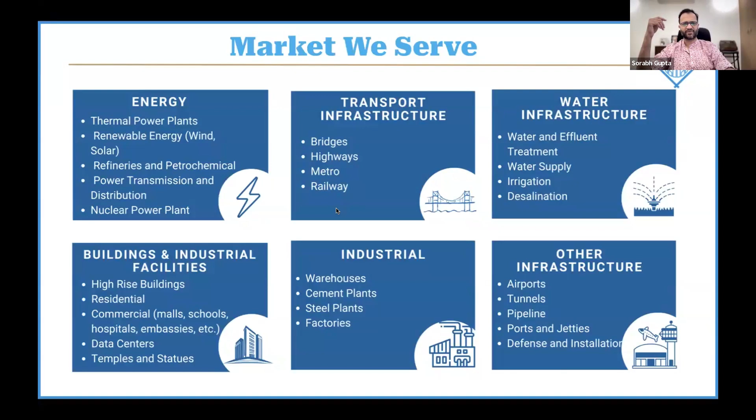We believe very strongly that professional associations such as DFII are very important in the life of an engineer. It's important for all of us to actively participate in these forums, share knowledge, learn from and support each other. DFII has been an excellent organization for many years now, so we always encourage engineers to get out of their wells and talk to each other on a common platform, sharing experiences and knowledge. This is something we are very active and vocal about.

Just a quick news item - I think we are one of the first companies in the country to extend the scope of our NABL accreditation to now cover the full range of our field testing. So all the conventional as well as advanced tests we carry out, both geotechnical and geophysical, as well as pile testing, are now covered in our scope of accreditation. I think this is one good step in the right direction. We always encourage all investigation companies to work towards this, so we can improve our service offerings and the quality of our product.

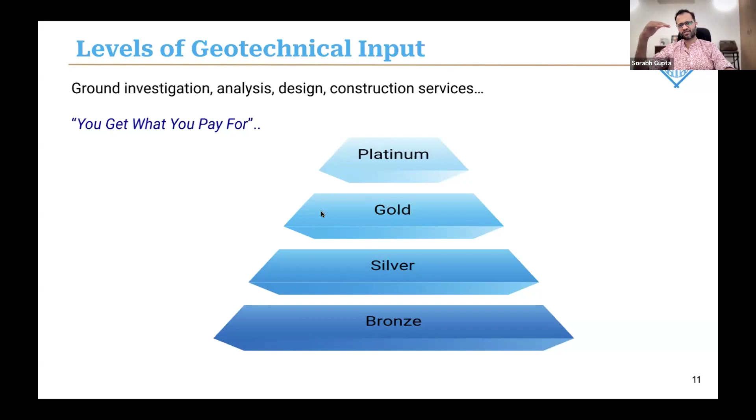We like to say that you get what you pay for in terms of what these levels are. I want to give credit to engineer Chris Haberfield of Golder Associates, who actually introduced us to this concept in one of his talks, so this slide is borrowed from Chris. It's essentially from bronze to platinum level investigations.

Without going into the details of the slide, what we are basically talking about is that as your structures get more complex, as your loads increase, and/or as your ground conditions become more complex or challenging, the requirement is to move up. A bronze level investigation could simply be, for example, a small building in a fairly well-known geology, where we can get by just carrying out a few shallow boreholes and using conservative rule-of-thumb kind of geotechnical design. This is fairly good because for such structures and projects it could be fairly inexpensive, and the risk involved would be high, but we can get away by giving a conservative design to the project owner. On the other hand, these days such projects are few and far between, and most of the time, as land becomes short and our projects get more ambitious, we are moving more and more towards a situation where our demand on the ground is increased.

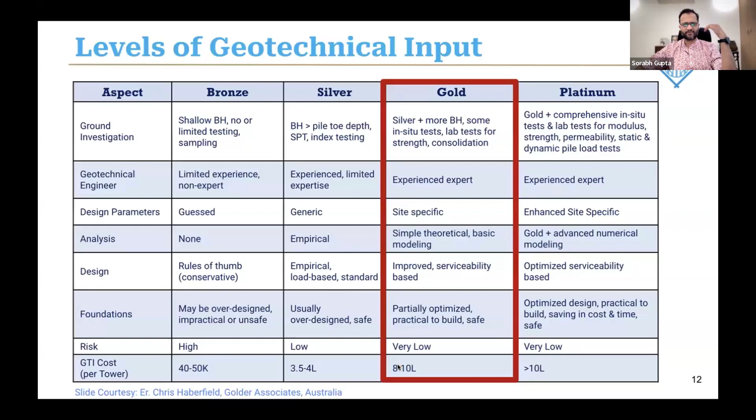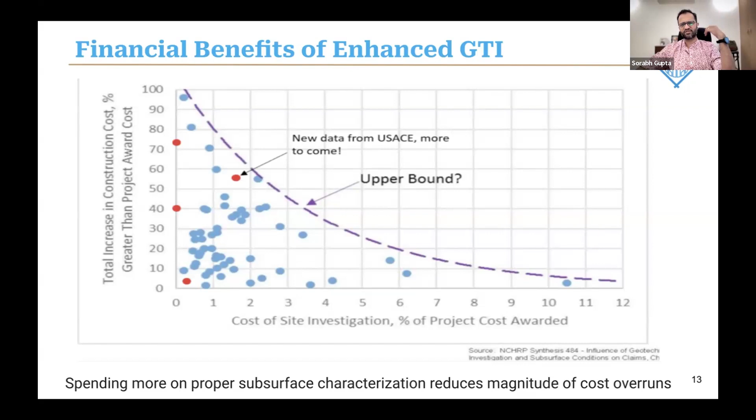Studies have shown, and I think most geotechnical engineers are aware, that as we invest more in proper ground investigations as a percentage of project cost, the cost overruns are well documented. As you invest more in ground characterization, you save on cost overruns, foundation construction timing, and construction schedules. We'll see today how such an investment is almost a no-brainer, because the return from proper investigations is phenomenal for almost every kind of project.

Jumping into high-rise buildings, I'm breaking this presentation into 6 parts. First we'll discuss the codal requirements, then talk about the tools we are using - better SPT, rock drilling, in situ testing, foundation testing - and finally I'll share one or maybe two case studies to illustrate how these techniques are used for better geotechnics.

A quick overview of codal requirements for high-rise buildings. For those who may not be working on high-rise buildings day in, day out, there's been a lot of movement in the codal requirements in the right direction. We now have a new code, IS 16700-2023, specifically made for high-rise buildings, defined as buildings with height between 50 and 150 meters, roughly 15 to 50 floors. This code becomes applicable for such buildings.

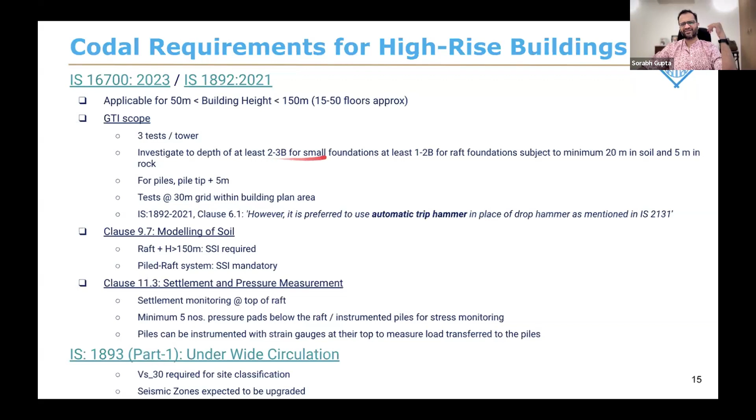This code is fairly good, and largely covers points for structural engineers, but I picked out a few clauses relevant to geotechnical engineering, starting with scope of investigations. The code refers back to IS 1892-2021. It clearly says that for high-rise towers, you require 3 boreholes or 3 tests per tower. The depth of investigation should extend to at least 2 to 3 times the width of the foundation for small isolated or open foundations.

For raft foundations, depth should be at least 1 to 2 times the width of the foundation. In non-tower areas, typically a grid of 30 to 40 meters is recommended for ground investigation. I'm also pointing out IS 1892 clause 6.1, which, as Dr. Partha Sarthi shared last time as well, shows the code is moving towards preference for automatic trip hammer use in SPT. The code also suggests that for rafts and tall buildings, soil structure interaction studies should be carried out to better understand distribution of K values at the foundation level, and for better soil structure design.

What is also very nice is clause 11.3 of IS 16700, which now mandates carrying out settlement and pressure monitoring for foundations, and I think this is great. Instrumentation is the future and should have been the past as well. It talks about the need for settlement monitoring for rafts, installing pressure pads below the raft, and also instrumenting piles with strain gauges, so you can actually measure the load transfer to the piles.

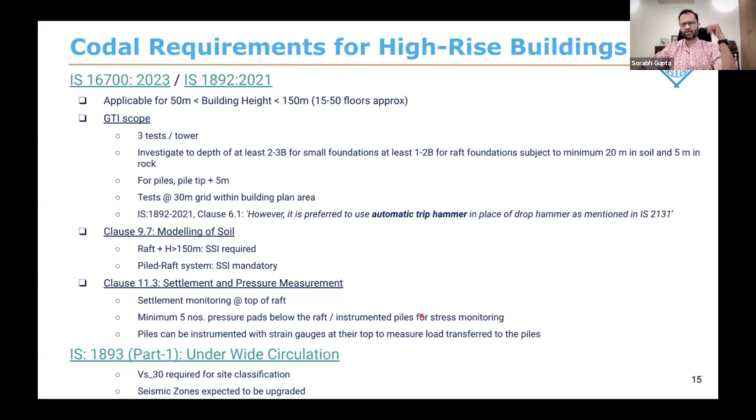I just want to mention IS 1893 Part 1 is currently in wide circulation and should be out soon. Apart from changes in seismic zonation, there are also expected changes in how we decide the site class. Once this code comes into action, rather than using SPT values for site class determination, we will need to carry out shear wave velocity tests at every site to get the VS30 values and define the site class based on that.

A little bit of technical discussion - I want to talk about SPT, the standard penetration test. This is an oft-discussed topic, but I want to keep driving on this point. Most geotechnical engineers worth their salt will agree with me when I say there's nothing standard about the SPT. This is something we're trying to educate customers about over and over again.

Obviously, your SPT number depends on so many parameters - your drilling and borehole technique, the type of equipment used, the test procedures used, the energy delivered, the overburden stress, and the ground conditions. So chances are, if you carry out SPT alone, using different equipment, different teams, or different kinds of hammer arrangements, you are going to get different end values.

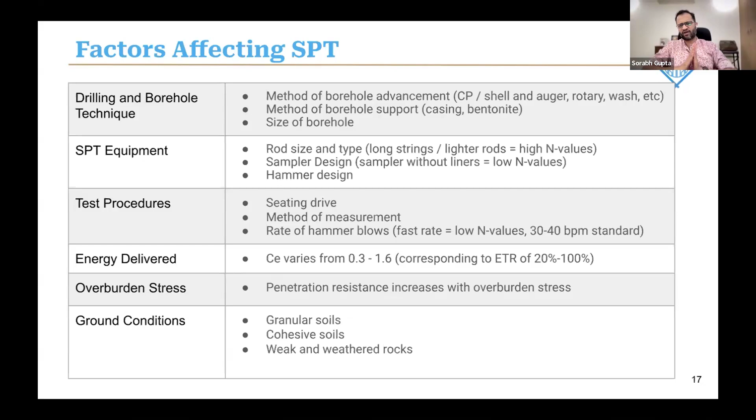I strongly believe that relying solely on SPT N value for geotechnical design may not be the smartest thing to do, because sometimes you could err on the side of caution, sometimes you're erring on the side of risk. It's very important as engineers, especially geotechnical engineers dealing with such complex material, to have data collected from various sources and corroborate the results before deciding on the design profile and foundation performance.

So one solution is to extend NABL accreditation to field testing. That step we have taken. Now the hammers themselves, which are supposed to be 63.5 kg, are calibrated. At least the weight has to be accurate.

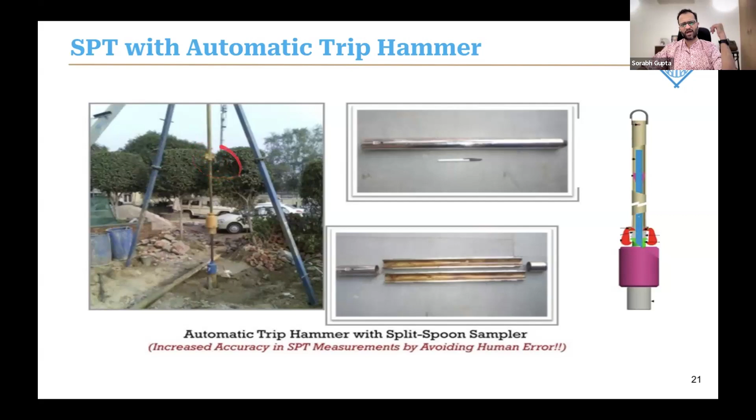The second improvement, and I think these are very inexpensive improvements which should be mandatory for all investigations, is the use of automatic trip hammers for SPT so that the height of fall is consistent.

The third thing, which is becoming quite popular, is we recommend carrying out SPT energy measurement for every project, for every rig or SPT arrangement being utilized. I'm happy to report that in the last year and a half to 2 years we have made a lot of effort, and today 70 to 80% of our projects carry out SPT energy measurement in-house for the customer, correcting the N values to N60.

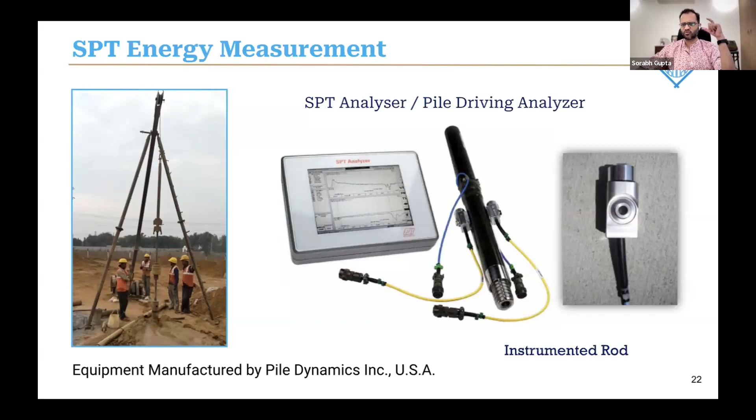This is important because the backdrop is that the N value we're supposed to use in analysis is N60 - that's what all the correlations tell us. 60 standing for 60% of the potential energy that should be transferred to the soil.

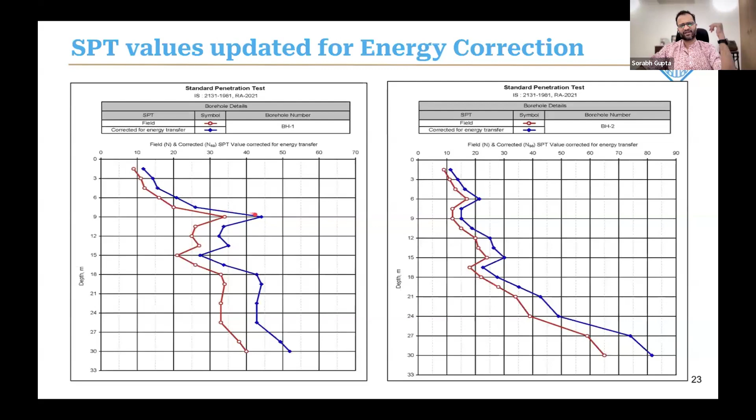The problem is we never bothered to measure it, so we never knew what our energy transfer ratio was. Now that we are measuring it, we are able to correct these raw field N values to get corrected N60 values on site.

This is very powerful because if you're able to correct your SPT values to N60, not only do you homogenize data collected by different types of SPT equipment, you also reduce the scatter in your SPT N values - sometimes the scatter was simply because of the nature of the test itself. We also managed to somewhat increase the reliability of SPT measurements.

If you're using SPT as your sole tool for deciding the net allowable bearing pressure, there's a direct correlation. So an SPT N value of 10 might give you, say, 100 kPa net allowable bearing pressure. You change that by just 30%, and your net allowable bearing pressure changes by 50%. So for small foundations, or any kind of foundations actually, energy corrections should be mandatory.

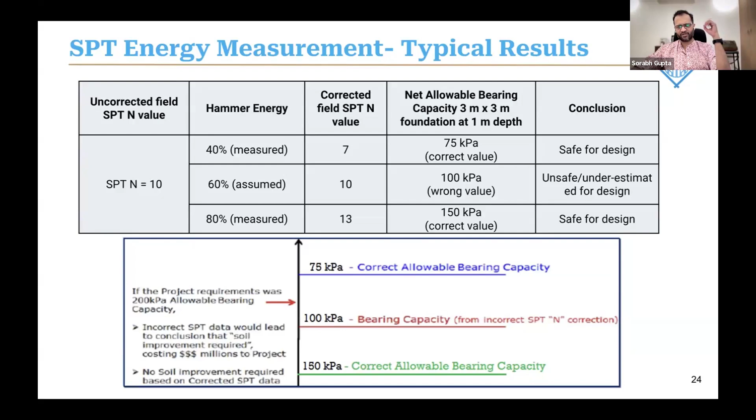That's SPT. Now I'm going to jump into rock drilling. Sometimes we have sites, high-rise buildings specifically in this case, where the buildings are bearing on rock. In Delhi, for example, we have highly fractured and highly variable quartzitic rock, which is hard to characterize at times.

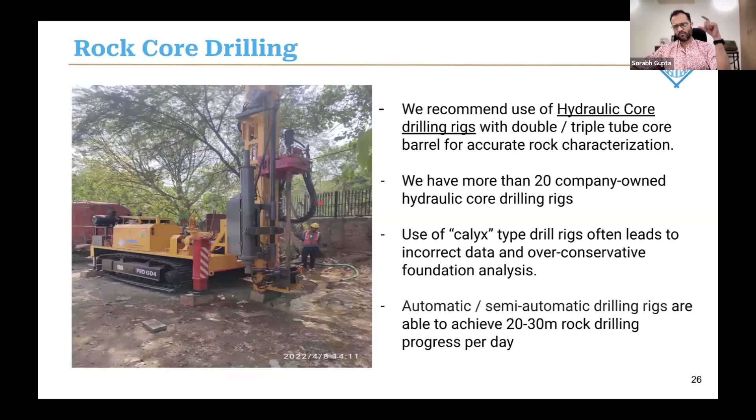For rock drilling, we strongly recommend always the use of hydraulic core drilling rigs only, with double or preferably triple tube core barrel for proper characterization of the rock. We do not recommend locally made Calyx kind of drill rigs, which we feel and have observed give incorrect rock core data and over-conservative foundation analysis. These automatic or semi-automatic drilling rigs are better, not only in terms of progress, but more importantly in terms of quality of the rock cores which we get.

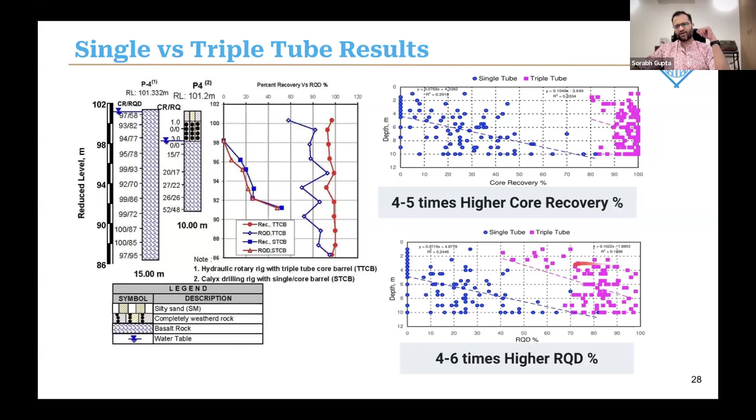Just a quick answer to why we should do this - this is an example where we did a confirmatory test at a site near the Tapi River for a bridge project. If you look at this blue series, this was the core recovery and RQD values we got when someone, not us, used a Calyx drilling rig with a single tube core barrel. Based on this, they had designed huge bridge foundations based on the soil report. When Cengrs went back and reinvestigated the site using hydraulic rigs and triple tube core barrel, the actual core recoveries and RQD values were substantially higher.

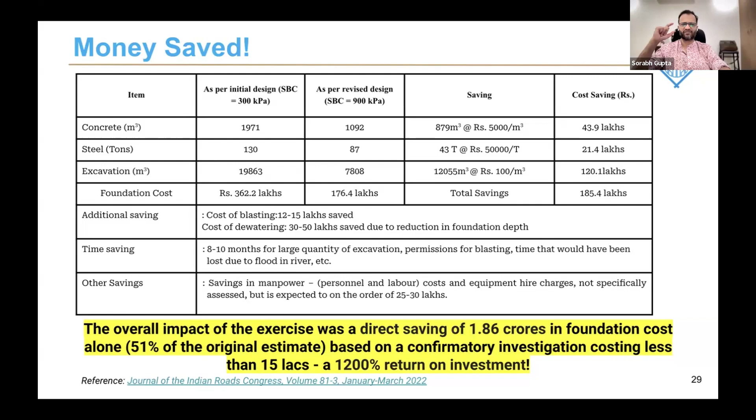Just the only thing is to have that knowledge, to have that awareness, to do the right thing. So that's rock drilling. I quickly want to talk about in situ testing.

This is one of my favorite slides from Professor Mayne, which I borrowed from him. People very often think about geotechnical investigations as boreholes, and we need to dispel this. We are trying to move people away from this archaic thinking that geotechnical investigation is the same as borehole investigation. It's like saying a surgeon will just be given a hammer to carry out surgery. That's not the case. There is a wide array of tools available to us as geotechnical engineers, and each of these tools, just like gardening or surgery, has its own strengths and weaknesses, pros and cons, its own applicability.

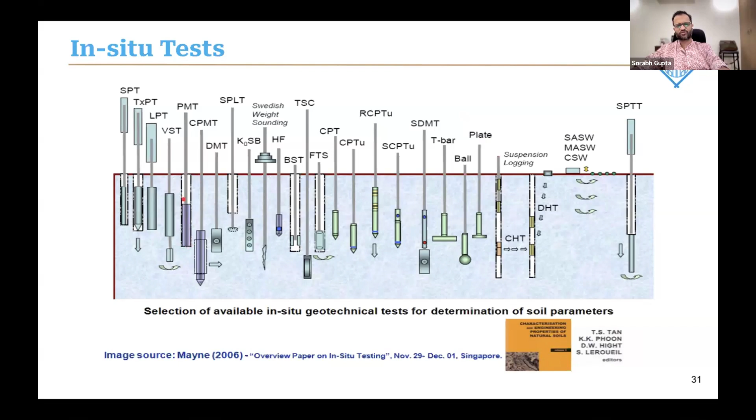This is why it's very important that when you have a project, you spend a lot of time right in the beginning to sit down with the design team and figure out the optimum scope of investigation, using a variety of tools in an intelligent fashion to get the parameters we want for foundation, ground characterization, and foundation design. It's important not to just shut our eyes and do a copy-paste job, a running meters job. It's important to do intelligent geotechnical investigations. It doesn't cost us anything extra to use our intelligence, but there can be tremendous savings for the customer.

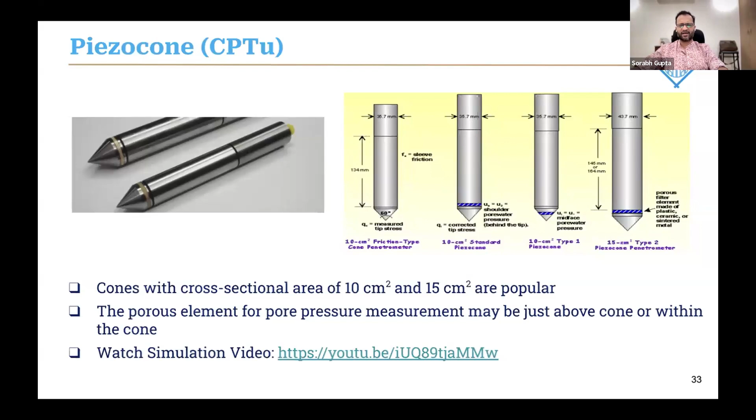One such tool is the electrical cone penetration test with pore pressure measurement, or the CPT. Actually it's the CPTU, the U standing for pore pressure measurement. This is what the piezo cone looks like. It's fairly straightforward. You have pushers which push a fully instrumented cone directly into the ground. The cone has various sensors at the cone tip level, along the sleeve, and so on, to measure cone tip resistance and sleeve friction. It also has sensors to measure depth, inclination, and pore pressure. Sometimes it has geophones inside to measure seismic wave arrival as well. So that's what CPT is, I will not go into further details.

It does have a limitation. CPT, apart from being very expensive since it's not yet manufactured in India and requires some skill to operate, possibly its only limitation is that it cannot be used in rock or boulder type formations. It's largely a great tool to use where you have overburden or soil.

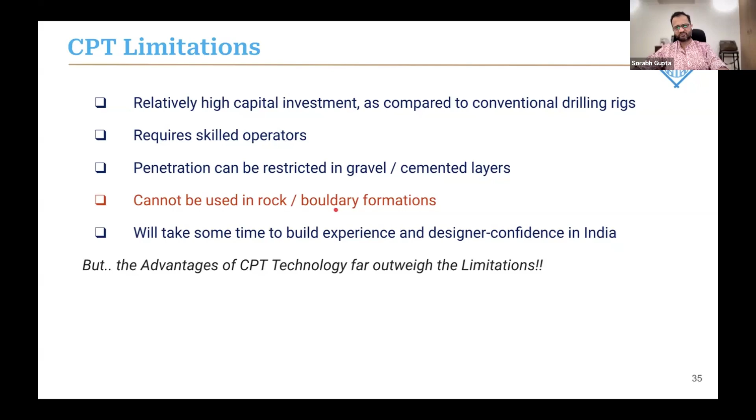That said, the advantages of CPT, I do believe, far outweigh the disadvantages. We like to say cheaper, faster, better, and we'll see how that is. It's not only fast, it's very granular, accurate, and versatile. It can go to deep depths. You can test reliably, and it is safe, clean, and cost effective.

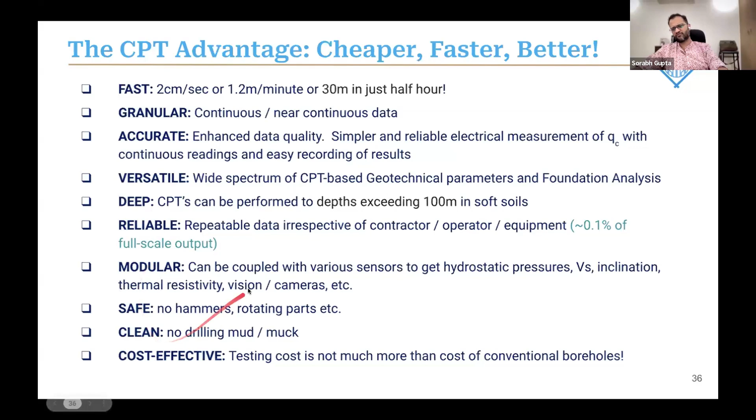Let's look at how fast this is with a quick example. If you do a borehole of say 30 meters, typical turnaround time including rig shifting, drilling, sample transport, lab testing, report compilation and so on, is a minimum of 15 to 30 days from start to report. In a CPT, if you do a sounding to 30 meters, you can complete it in just about 2 to 3 hours, and have a report in hand in 4 to 5 hours. In today's fast-paced environment, saving time for investigations is very powerful, because it gives more time for design and more time for construction.

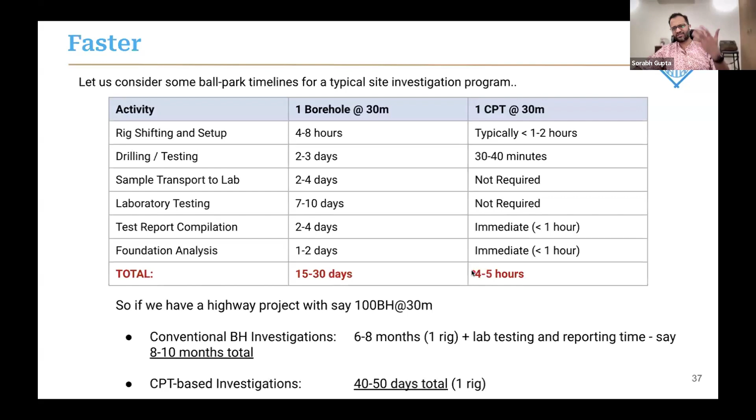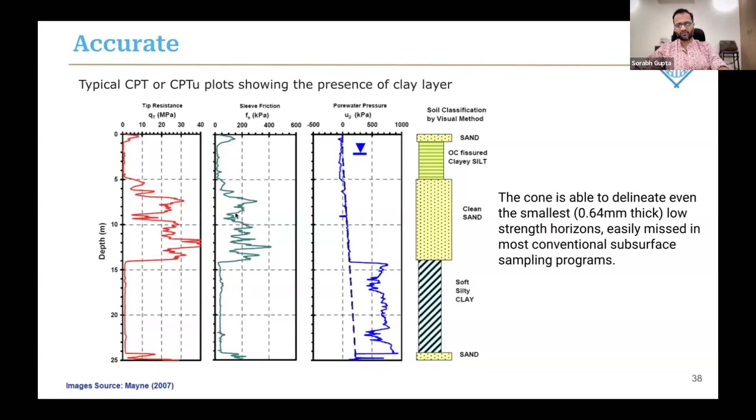Of course, CPT is far more accurate compared to conventional borehole investigations. In borehole investigations, we get data points every 1.5 or 3 meter intervals where we do SPT and collect samples. In a CPT, because it's digital, you get continuous profiling of the ground, with data points every 2 centimeters. That's good because even a thin seam at any depth can be accurately captured during investigation, which would typically be missed in a borehole program. It's also highly repeatable, and I love this about CPT. If you do a CPT at the same location multiple times, you will almost always get exactly the same data.

Something which we could not even imagine when we are doing boreholes - you do 2 boreholes at the same location, you'll usually get around a 20-25% variance in the SPT N values. In CPT, the fact that it's repeatable to the extent of 0.1% of the full-scale output, I think this is very powerful because it gives a lot of confidence to the geotechnical designer.

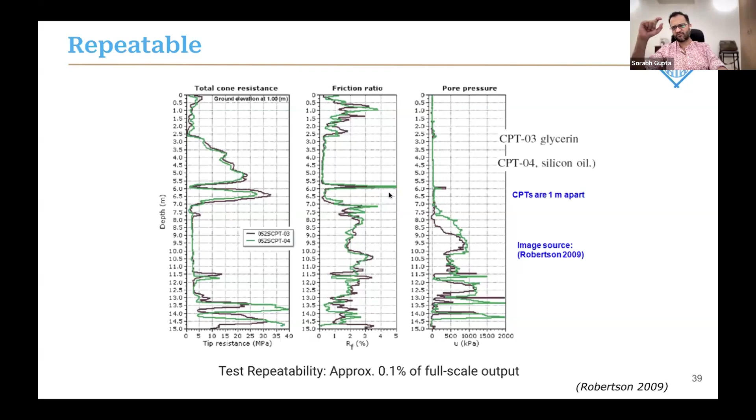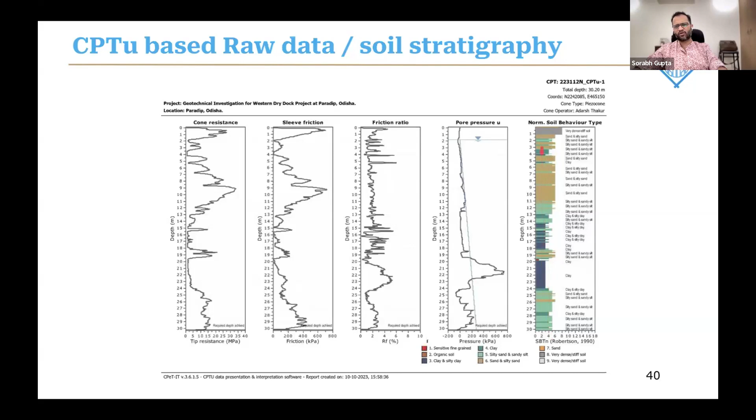Because you know that you are getting data which is consistent, repeatable, and highly representative of the actual ground conditions. This is typical CPT data, and since it's software driven from Robertson's charts, you also get your soil type or soil behavior type from CPT. We've done thousands of CPTs and compared with physical classification from boreholes, and we have found that the soil behavior type from CPT is usually fairly bang on compared to what you get from borehole investigations.

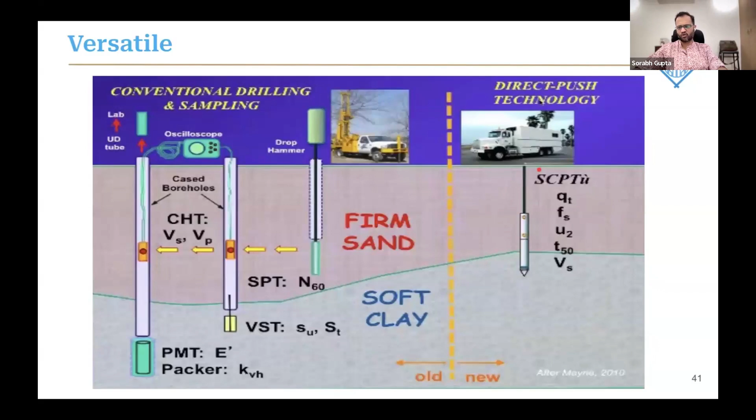There's also the versatility of the test itself. While if you want parameters you have to do a host of other tests, if you don't have time or budget, you can push a cone into the ground and get a fairly good handle of all these various soil parameters in a single push. So very versatile and powerful for pre-bid preliminary investigations, also very useful for detailed and confirmatory level investigation.

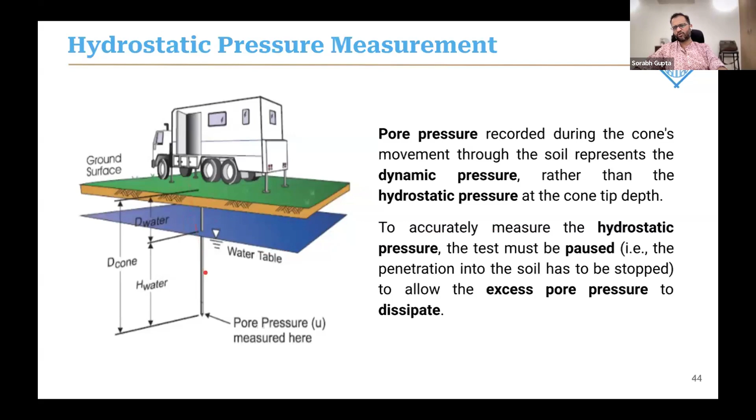Since we're measuring pore pressures, you can actually get a fairly good idea of the hydrostatic pressure when you push a cone into the ground. You can also stop the cone and carry out dissipation tests, which is very powerful if you want to understand the compressibility of the ground, or the hydraulic parameters, the permeability of the soil surrounding the cone.

I would like to point out, since this is an in situ test, the quality of consolidation and permeability data you get from a CPT is far better compared to what we get when we withdraw a so-called undisturbed sample from a borehole, take it back to a lab, put it in an oedometer or consolidometer, and test it. I really feel in situ testing gives much better characterization in terms of compressibility and permeability.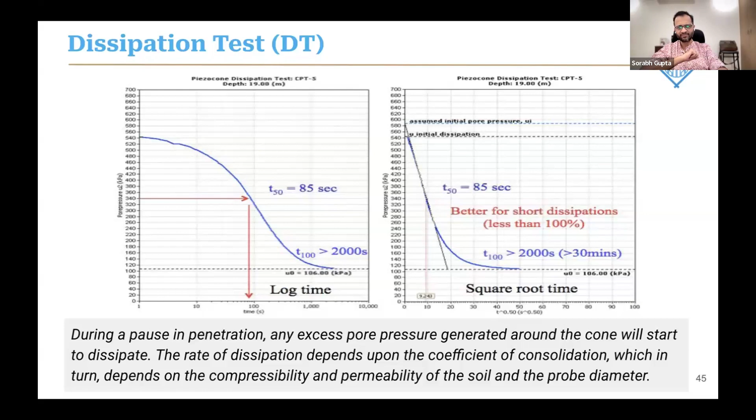A common complaint used to be that you can't take samples in CPT. For some reason, many people still wanted to physically see samples before making a decision. So we added capability to collect soil samples using the CPT equipment itself - a push sampler, a dummy cone with a piston-like sampler, which can be pushed into the ground, allowing us to collect physical samples of soil at discrete depths.

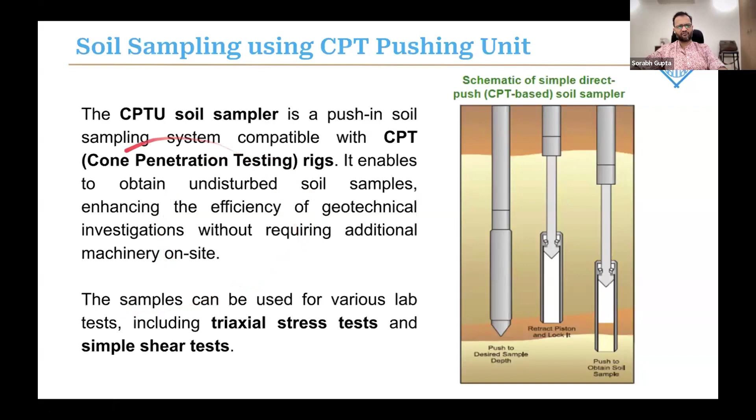This is fairly useful if you don't have a drilling rig at site, just a CPT rig. Very useful because then you're able to collect a few samples, carry out some confirmatory tests in the lab, check your classification, and so on. So it's very good for situations where you don't have a drill rig at site.

That's about CPT - I'm not going too much into depth, just trying to give an overview of these test methods. Pressure meter test is another favorite. If you go to France, most investigations are done using the pressure meter, and that's where we got our equipment from. This is a Menard pressure meter, which you see here in the photograph.

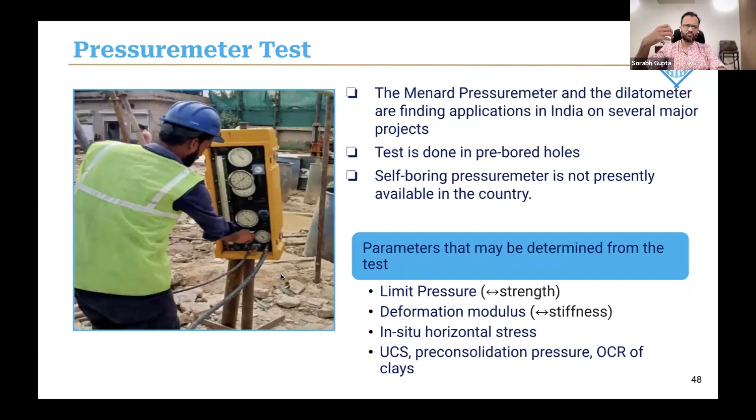Now I want to talk about why this is important - why this is so exciting. If you look at high-rise buildings, you have the strength criteria and the stiffness criteria, or the shear and settlement criteria for design. Most large-sized rafts are unlikely to fail in shear, so we never really go up to the full ultimate strength of the soil. What we are working with is the serviceability criteria - we look at the settlement criteria, and the key performance parameter of the ground we're trying to decipher from our investigation program is the stiffness profile of the ground.

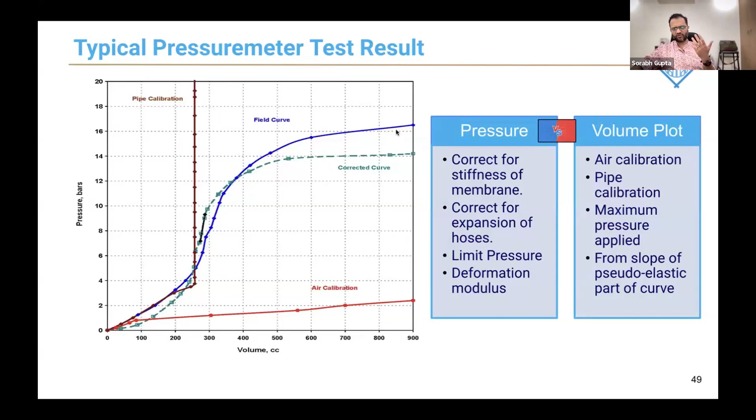You'll note here that the stiffness characterization from in situ testing is roughly 3 to 4 times higher compared to what we believed the stiffness of the ground was when using empirical correlations based on SPT.

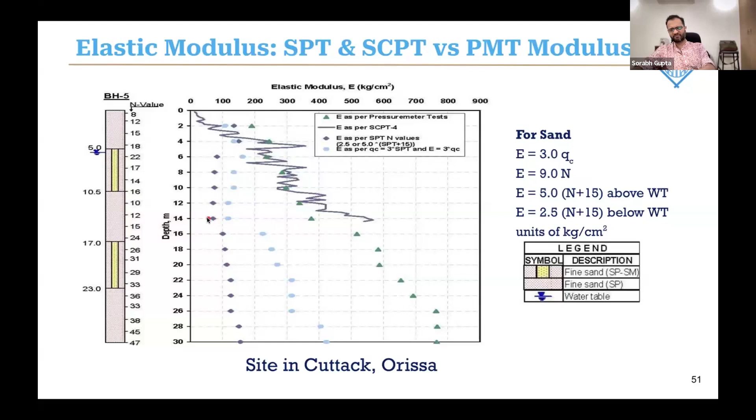Before that, I want to talk about shear wave velocity. It's fairly common today in most infrastructure projects, not so much in building projects. In high-rise projects these days, shear wave velocity tests are being carried out, and I think once the new 1893 code comes out, this will become an everyday test for us, so it's good for us to understand.

There are many tests available for determination of shear wave velocity profile. I want to talk about two of these. The first is a cross-hole seismic test. I think this is the gold standard test in the world for accurate determination of shear wave velocity profile. The test is fairly straightforward.

We make 3 boreholes typically, 1 source and 2 receivers. Once the borehole is drilled, it's cased, and the annular space between the casing and the ground is grouted bottom up. Once the grout sets, you go back to the site with this kind of equipment. You lower typically a source, usually an electromagnetic kind of source triggered from the ground, into the first borehole, and you lower triaxial geophones into the other 2 boreholes.

The concept is very straightforward. When you generate the seismic waves at the source and catch them at the geophone locations, the velocity calculation is simple: velocity is distance by time. Assuming you know the distance between the source and receiver, you divide that distance by the time it takes for the compression and shear waves to travel, and with that you get the compression and shear wave velocities.

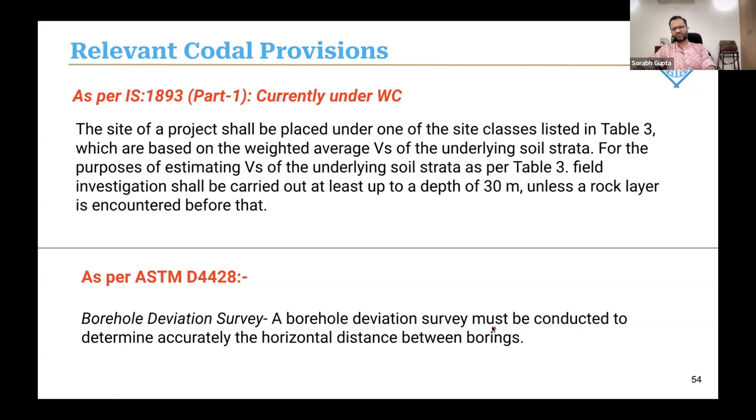I also want to point out that when we talk about crosshole testing, something we sometimes miss is the borehole deviation survey. I'm pointing to ASTM D4428, the standard we follow for crosshole testing, which almost mandates carrying out a borehole deviation survey. So what is a borehole deviation survey and why is it important?

I'll get into that, but before that, this is what the crosshole seismic test results look like. You get your shear and compression wave velocity profiles, and based on that, you can compute your dynamic Young's modulus and dynamic shear modulus profiles, as well as your dynamic soil parameters.

I want to point out the reason we are carrying out crosshole seismic tests right now is for this: when we get the dynamic Young's modulus profile, this is very powerful because it's essentially Gmax, the low strain dynamic modulus, the elastic modulus of the soil. If you look at any degradation curve, this is typically at very low strain levels, but if you degrade this modulus down to the strain level of interest, typically 2 to 3%, you get a fairly good handle of what would be the equivalent static Young's modulus at the strain levels of interest.

So we typically degrade this modulus down to our design strain levels, and we always compare the modulus value with what we got from CPT, from pressure meter, and also from lab testing and empirical correlations. So all of this effort goes in one direction: again and again, we are trying to understand the stiffness profile of the ground so we can do serviceability or performance-based design better.

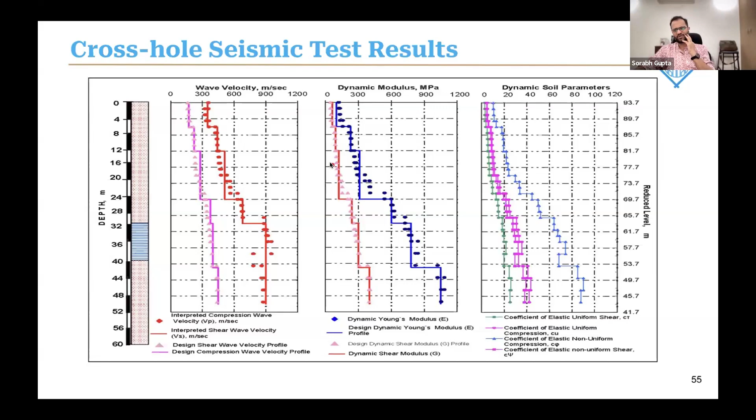I talked about borehole deviation survey, and why that's important is it's very straightforward. You put an inclinometer between the source and the receivers, and the objective is to measure the distance between the source and receiver at various depths to get that distance profile. That's obvious because when we did the crosshole test, we were measuring the time of arrival in microseconds. But if you don't know the distance between the two boreholes with depth, all our computations are essentially wrong. You can't just put a tape measure at ground level, measure 3 meters, and use that as the distance traveled by the wave at depth. It's simply wrong, and all the time and money invested in crosshole would be wasted. So if you're carrying out crosshole, always remember that borehole deviation survey is a must to get proper crosshole seismic test results.

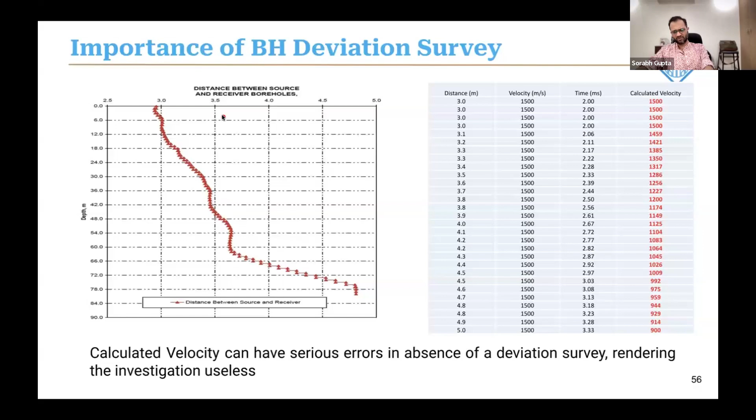The second test - I'm a huge fan of crosshole seismic. We've been doing it for 15, 20 years now, in-house with our own equipment. The only problem with crosshole is it's expensive, because you have to make 3 boreholes, grout them, and carry out this test at site. The second problem is it takes a lot of time. Between drilling, grouting, grout setting, and testing, typically 25 to 30 days is the turnaround time for getting my shear wave velocity profile. That's fine, it's a good investment if you have a critical project like a refinery or power plant - definitely, by all means, we should do it.

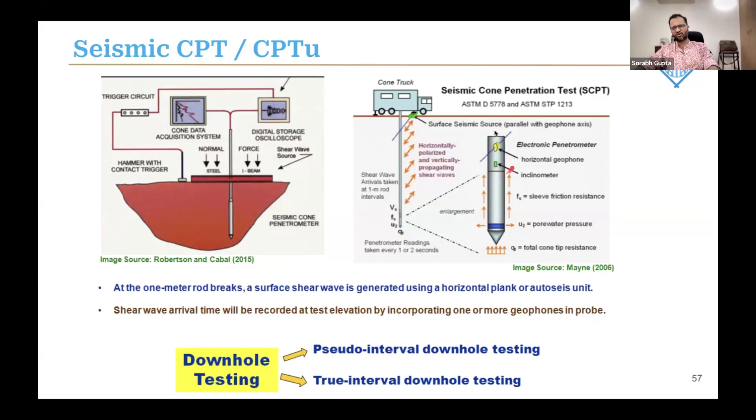But in some cases, where we need a quick estimate of shear wave velocity, the other solution we offer is the seismic CPT. Remember we talked about the cone penetration test - we also have a different module now known as a seismic cone. A seismic cone is essentially a piezo cone, measuring cone tip resistance, friction ratio, pore pressure, inclination, depth - all the usual stuff. In addition, there is a seismic module, a follower attached to this cone, which also has geophones built into it.

That's powerful because now we can actually do a CPT and stop the seismic cone at a certain depth. We can use a ground source for seismic wave generation, and carry out a sort of downhole seismic test using the seismic cone. So you know the distance traveled by the wave and the time it takes, and you can get a fairly quick determination of shear wave velocity profile using a seismic cone.

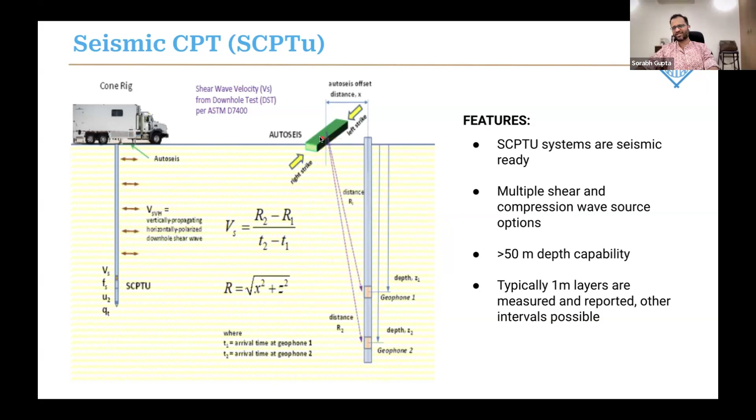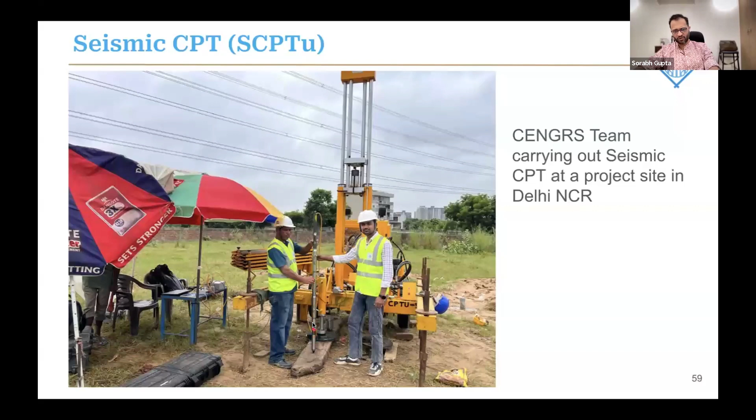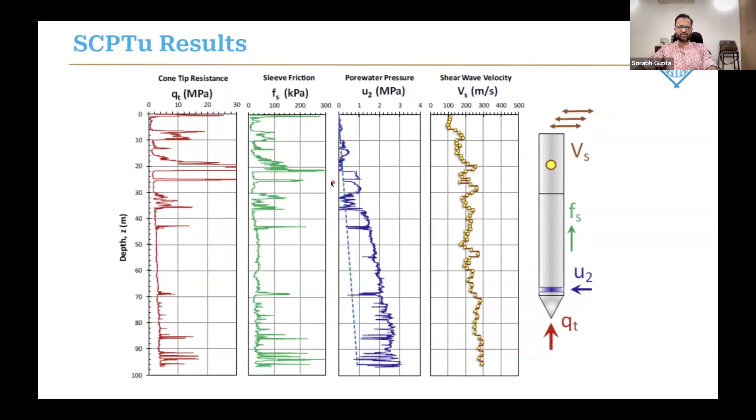Personally, the reason I'm very fond of this is not only because it's cheaper and faster for the customers, but what I really enjoy is the quality of seismograms you get in a seismic CPT. We bought this a couple of months ago, so we are still playing with it. This is the seismic cone with the seismic module follower on it. The quality of seismograms and data you get is tremendous because there's no disturbance to the ground - no requirement of boreholes, casing, or grouting. Since it's a direct push method, you get very good quality waveforms, which makes it possible for us to have very confident, accurate picks for compression and shear waves. The only limitation of the seismic cone is you can't do this where you have very hard strata or rock - in those cases, you have to go back to borehole investigation techniques.

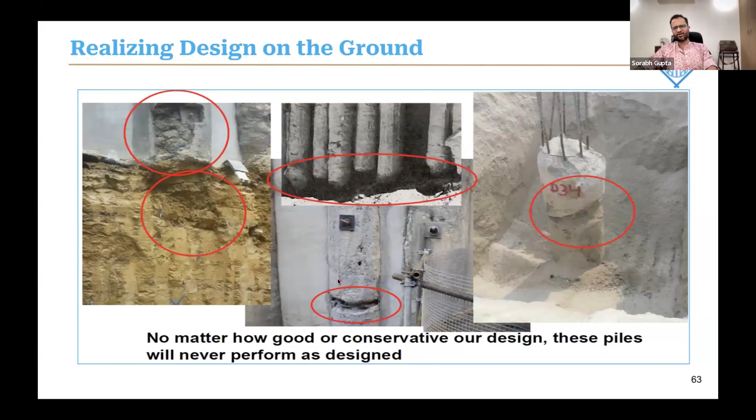I'm going to skip this slide. So we talked about different techniques. I want to wrap it up by talking about foundation testing. No matter how much investigation and good design you do, there's absolutely no point if we cannot translate a design onto the ground. So it's very important for the geotechnical and structural engineer to work together during the design and construction phases.

Often the geotech engineer is forgotten after the soil report is issued, and this is not a good trend. We encourage customers to involve us all the way through until the foundations are done and dusted.

It's very important to carry out third-party foundation testing at your site. It's not a good idea to put it in the scope of the piling contractor. It's always better that the owner gets the QA/QC done by a third party for his project.

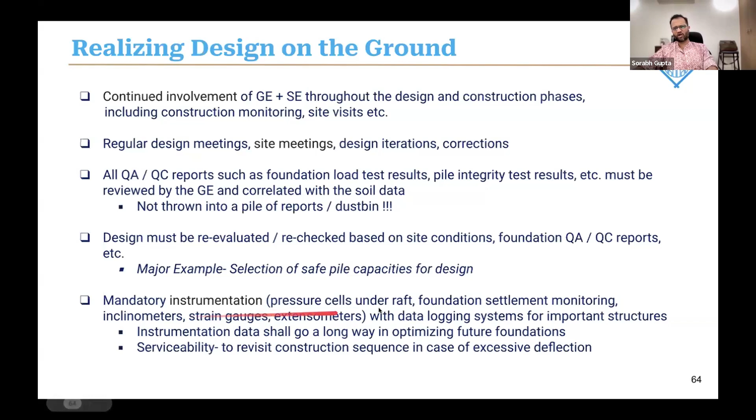And obviously, instrumentation is always a great idea for projects. These days we have so many options for instrumentation, let's take advantage of that.

It's 5:45, so I'll quickly show you a case study. Pranav, how much time do I have approximately? Maybe the last 5 minutes. Oh yeah, so I'll breeze through this.

This is a group housing project in Sector 104, Gurgaon, which we concluded a couple of months back. These are 5 high-end towers, 40-storied, and some 2 towers of 30 stories with 3 basements. There's also some commercial building and so on.

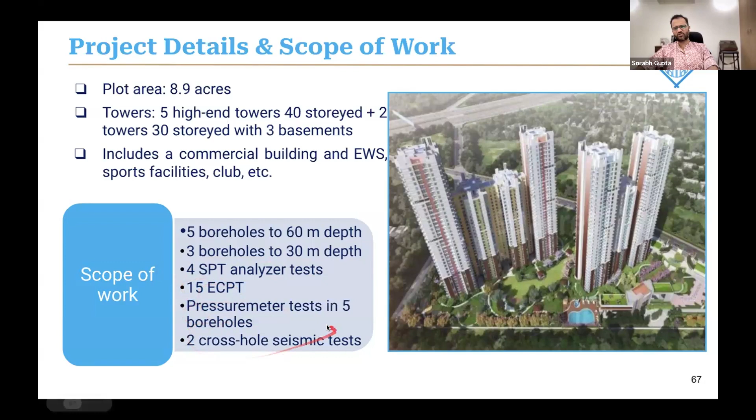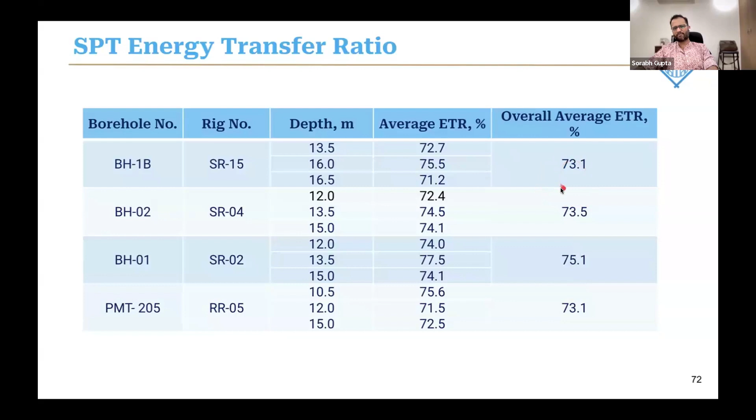Quickly look at what you get, the ETR value, when we use a standard automatic trip hammer mechanism, the ETR value is around 73%. It's fairly consistent, which is nice, for 4 different rigs we got fairly consistent ETR values. Essentially this means you're able to bump up your SPT N values by a factor of 73 divided by 60. So we managed to correct the N values to N60. This is the first level of improvement.

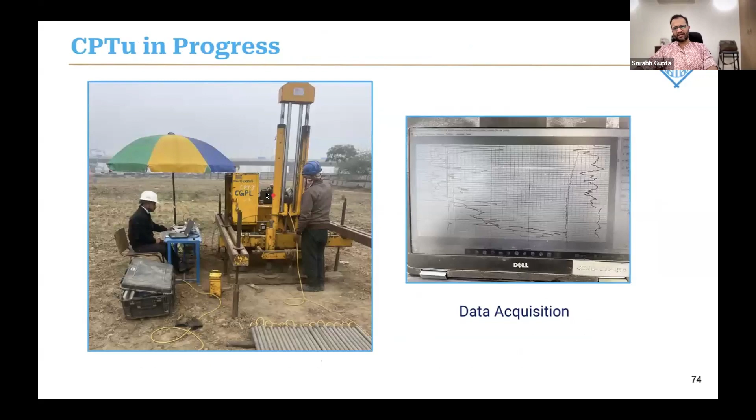We did CPTs and got some CPT data. We always have a lot of fun with CPT because when we're doing a bunch of tests, we get to cross-correlate what we get from boreholes and what we get from CPT. This is standard practice now, we have a huge database of over 1,000 CPTs which we've correlated with borehole data, and we're always amazed at how well it correlates.

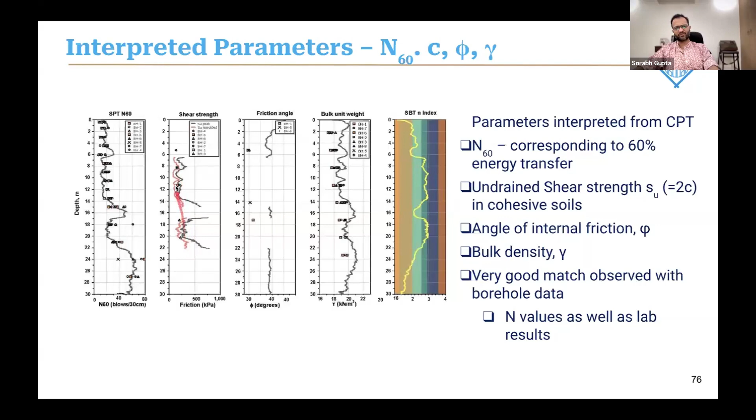Look at the SPT N60 value based on CPT and how well it matches what we get from the adjoining boreholes. Shear strength, same condition, the predicted shear strength values from CPT match what we get from the lab. Also friction angle, unit weight, and so on.

I don't have time to go into this, would have loved to, but this is the CPT results. Also, I want to point out we also get shear wave velocity from CPT, and we cross-correlated that with what we got from cross-hole seismic tests at the site, and you see how good the correlations are.

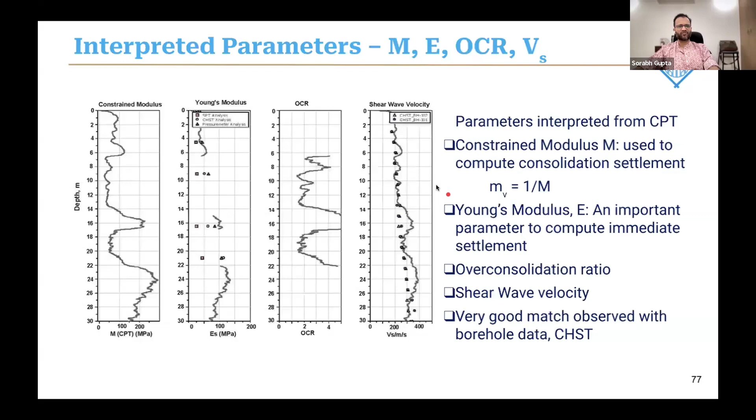This could be the topic of a long discussion, but for now I want you to take away that as long as these different approaches tell the same story and things match, geotechnical engineers can go to sleep and sleep easy.

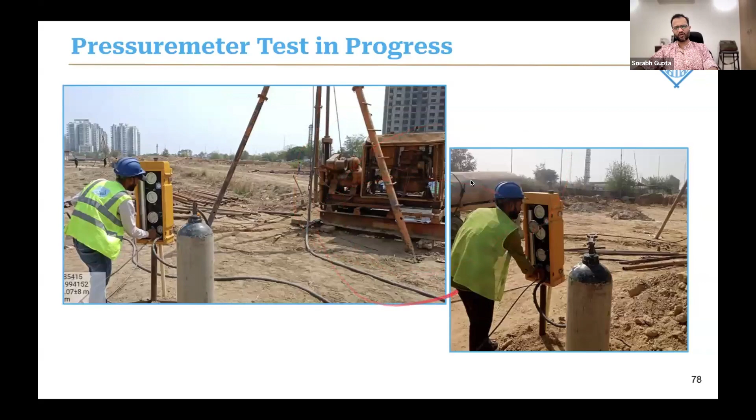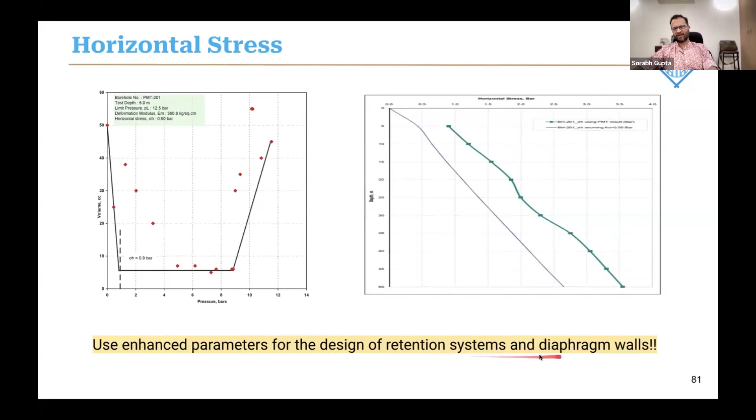I want to point out we also use pressure meter data to calculate the horizontal stresses at the site. These days, with multiple basements in most high-rise buildings, this is very powerful because it's the only way you can actually measure or compute the horizontal ground stresses, which will act on the retention system and on the diaphragm walls. So it's very good input for design of underground retention systems as well.

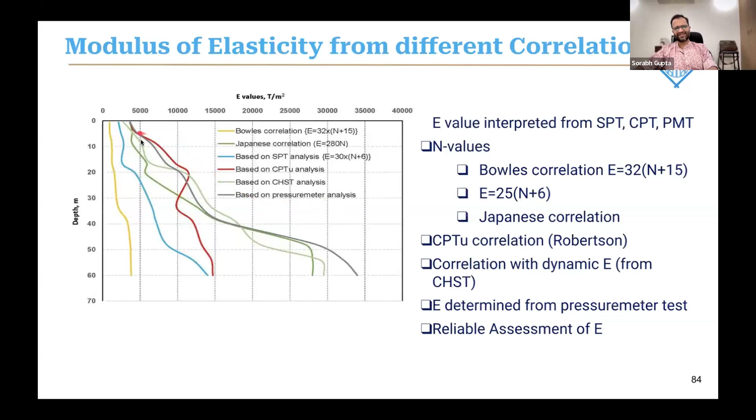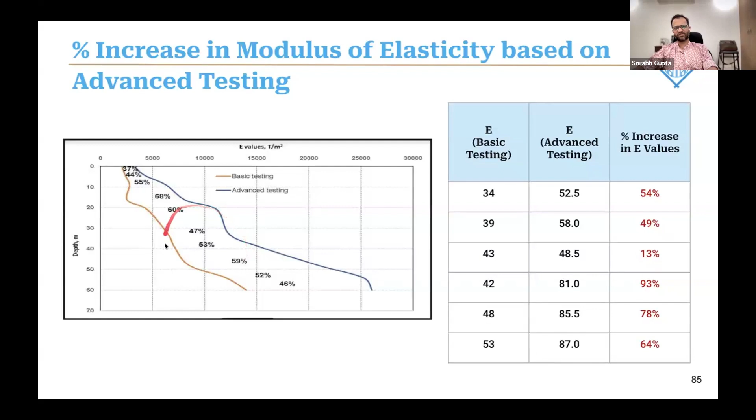So we select the design profile based on advanced testing. We're able to select a better stiffness profile, which, as you see here, is typically around 50% higher than what we could select based on conventional testing. And that makes my foundation analysis all the better.

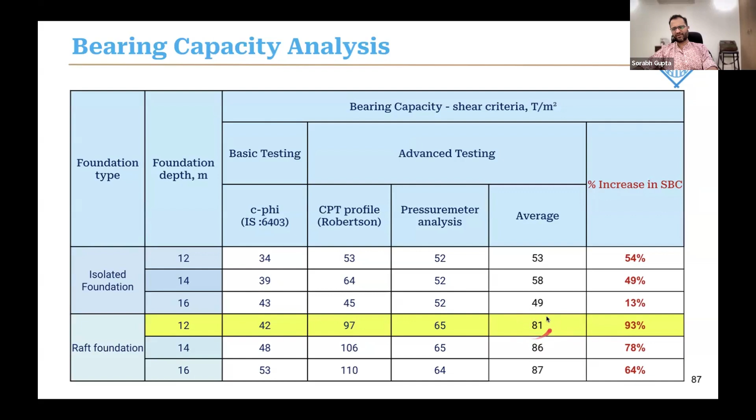So we did a quick comparison for a raft bearing at 12 meters, where basic testing means borehole based or SPT based predictions. We got bearing capacity shear criterion of just 42 tons. We managed to recommend as much as 81 tons, so almost double the SBC, remembering SBC is safe bearing capacity based on shear criterion. So we could justify almost double the SBC values.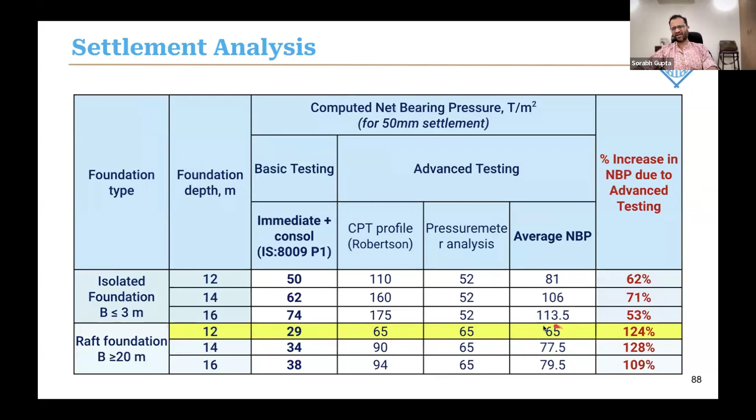In terms of net bearing pressures, settlement criteria, at the same depth, in place of 29 tons per square meter which we got from boreholes, we could justify the use of 65 tons per square meter for the same foundation at the same location. You see how powerful that is, because you are able to bump up your net allowable bearing pressures by almost 110 to 130%.

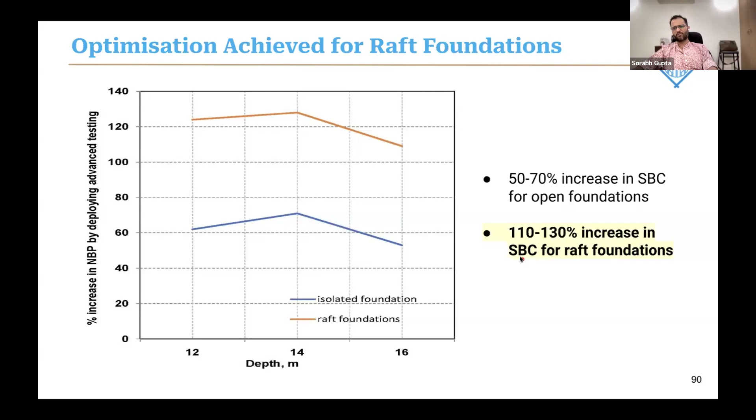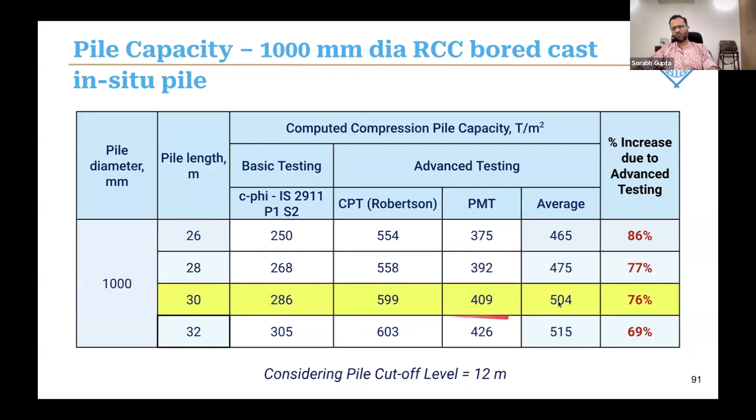At the same time, it's the same story for piles as well, where our earlier calculations based on IS 2911, based on the c-phi method, we could compute 286 tons. Now we were able to compute 504 tons, so a 76% increase in safe pile capacities as well. So that's for us, right?

What this means for the customer, I took some help from my friend who's a structural engineer, and for this project he calculated what this means in terms of cost saving, because end of the day, the buck stops with the cost of the project. So with basic geotechnical or borehole testing, we got an SBC of 34 tons per square meter. The cost of the foundations was around, I don't have the total cost, it will come in the next slide.

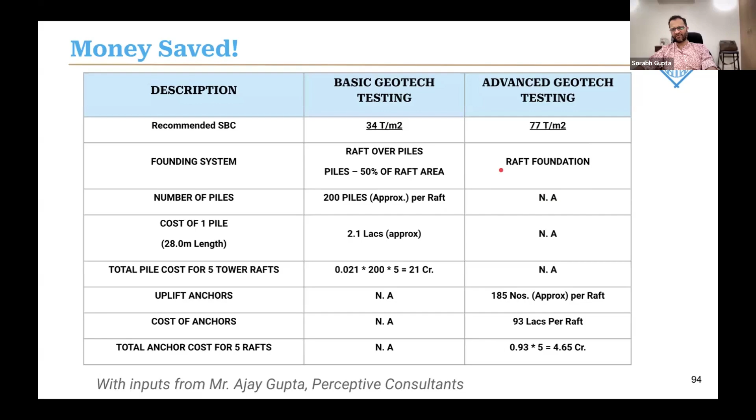So he had originally planned pile foundations based on the original testing. This is a true story, because he actually got a soil report done where the customer was willing to go with 200 piles per tower, and the budgeting was all done. When we came back and did advanced testing, we managed to eliminate piles altogether, and gave a design based on simple raft foundations.

The cost saving of this exercise - while the spend on advanced investigation was around 45 lakhs, still a large number, and the customer balked when we gave him this cost - when we finished the work after 2 months and came back to the customer, we managed to show him that he saved more than 16 crores in material cost of foundations alone. And that's a 3,600% return on investment.

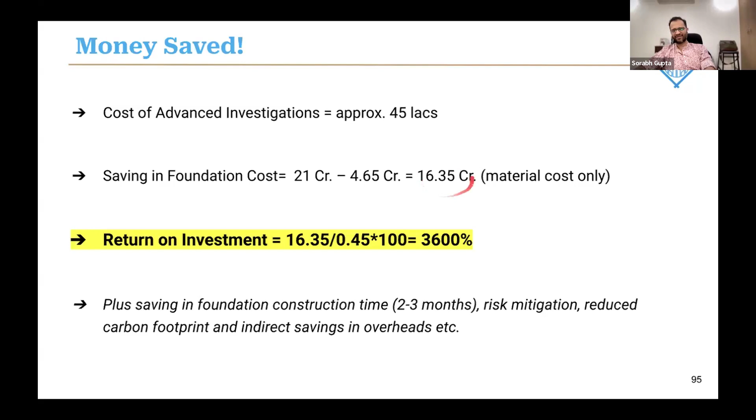So we started doing these things because we realized that this is the language customers understand. And where 16 crores is material cost, if you start adding the savings in foundation construction time of 2 to 3 months, reduced carbon footprint, savings in overhead, etc., the cost saving effectively for the customer is upward of 40 to 50 crores, right? So that's huge cost saving for the client.

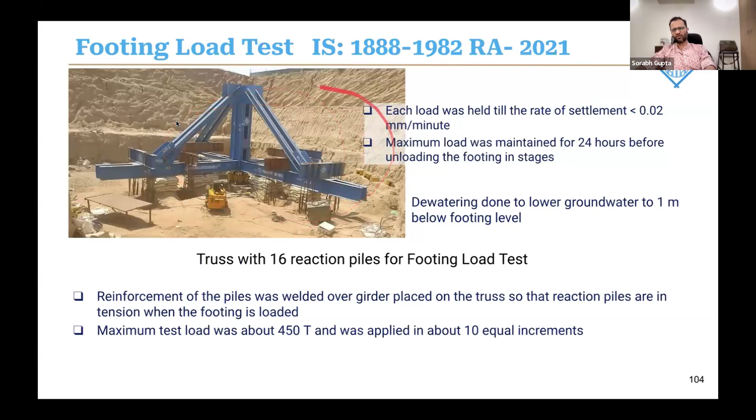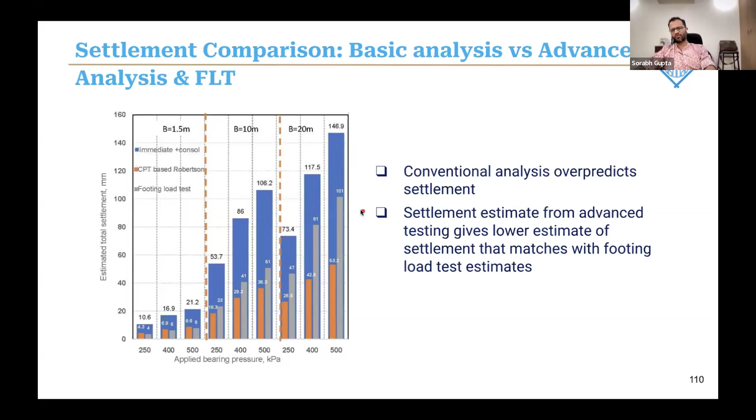I don't have time for a case study too, I just want to point out one thing. We've done a lot of these projects now. What we did not do in the last project, and we did here, is we also carried out a footing load test on a 2x2 size footing. So we are checking what the settlement predictions based on model tests at site give, against what we get from our theoretical estimates, and we found that even the model tests at site match what we get from advanced testing quite well.

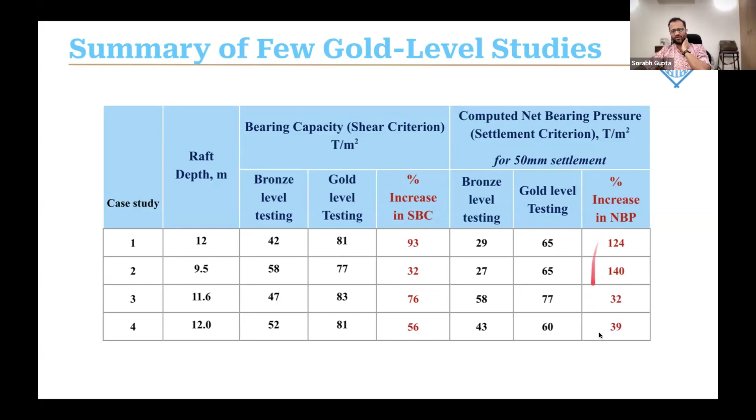I want to close with the last 2 slides. We've carried out around 25 to 30 high-rise building projects in the last year and a half alone. I'm still putting the results together, but I want to share 4 different case studies just so you don't think the results I showed are anomalous. Consistently, when we do better investigations, we are getting better safe bearing capacities and better net bearing pressures in almost all cases. So better testing, better design - that's my conclusion right there.

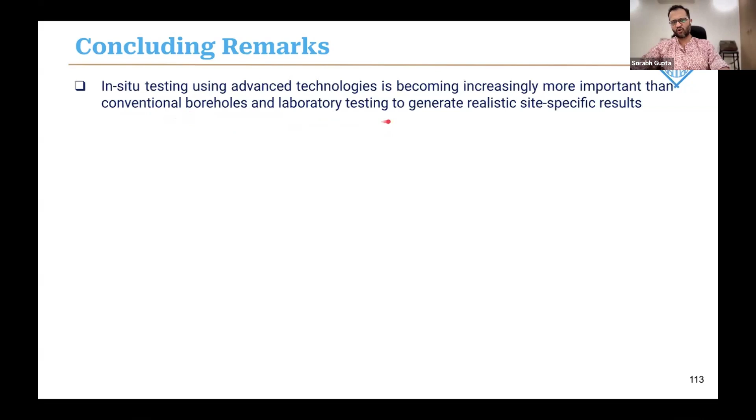I'm going to close with this slide. In situ testing using advanced technologies is becoming not only increasingly more important, but we are also becoming more aware of these techniques, and they're becoming more popular compared to just conventional borehole and lab testing results. We encourage everyone to invest in gold level geotechnics for critical projects, not only high-rise buildings but also refineries, power plants, highways, you name it. It's important for improving not only the safety of foundations of structures, but also foundation performance.

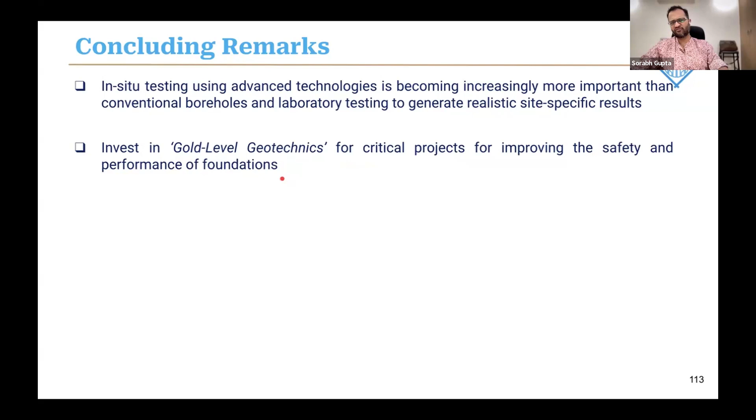Case studies have shown 50 to 150% increase in SBC values based on gold level techniques, and this translates in terms of money for the client to an ROI in the range of 3,000 to 4,000%. So this is essentially free - this is no longer an expense or a cost to the customer. What customers and project decision makers have to understand is that investigation is no longer an expense, it's an investment.

Optimum foundation performance requires a change in approach, and that's what we are trying to do. Starting with site-specific ground investigation scope, not a copy-paste scope where we take a BOQ and paste it onto the project. Let's move away from that regressive thinking, discuss our project requirements, and use our intelligence to work out a tailor-made, customized scope of investigation for that project, for the ground conditions, and depending on what we're looking for.

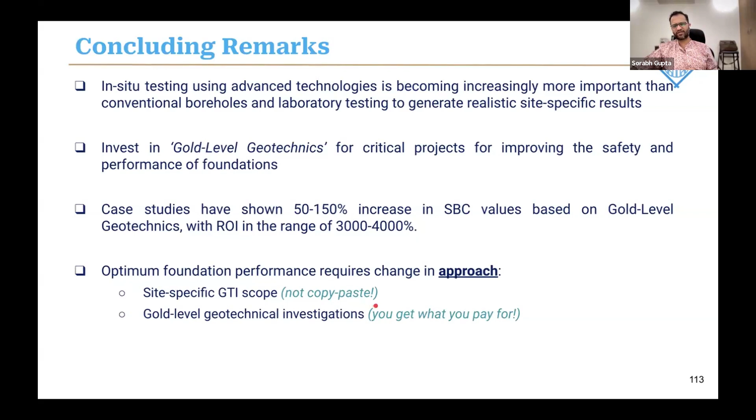Gold level geotechnical investigations, as you saw, are very useful. And once again, you get what you pay for. So if you pay a little more, invest a little more in investigations, you will definitely get what you pay for.

Performance-based geotechnical design is very important, including soil structure interaction. You must design properly before you get into construction mode. Lastly, third-party QA/QC and proper ground instrumentation, foundation instrumentation is very important for realizing the design on the ground. Let's not depend on contractors who we have selected on L1 basis.

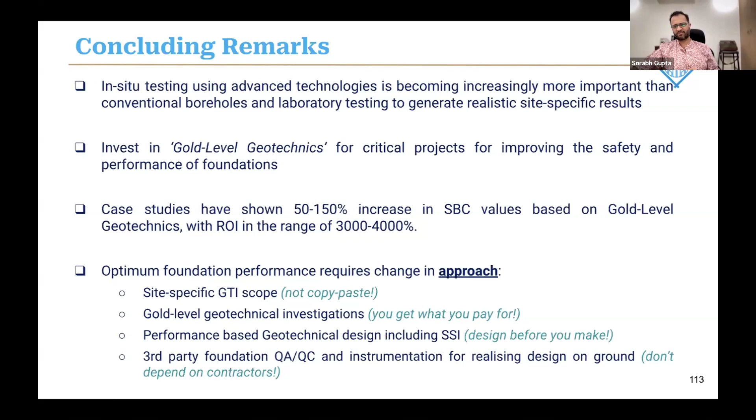Again, I think a different approach, this kind of a 360-degree approach, would go miles in advancing our country to the next millennium. Thank you so much for your time. I want to end here. Pranav, over to you.